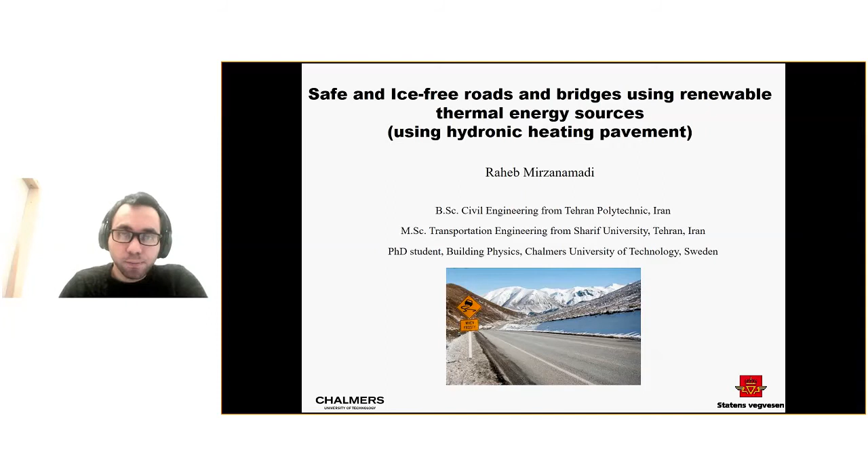I have to say that the research I did in the last 3.5 years resulted in a few publications, which this presentation is based on. The first are 2 published journal papers: one in Construction and Building Materials, and another in the Journal of Cold Regions Science and Technology. There's also one accepted conference paper for Cold Climate, which will be held in March 2018 in Kiruna. I will give results from these papers in detail in this presentation. There are also two ongoing papers, one related to a hybrid 3D numerical simulation model, and another on the application of a model-based predictive control method, which I will give a brief introduction to as well.

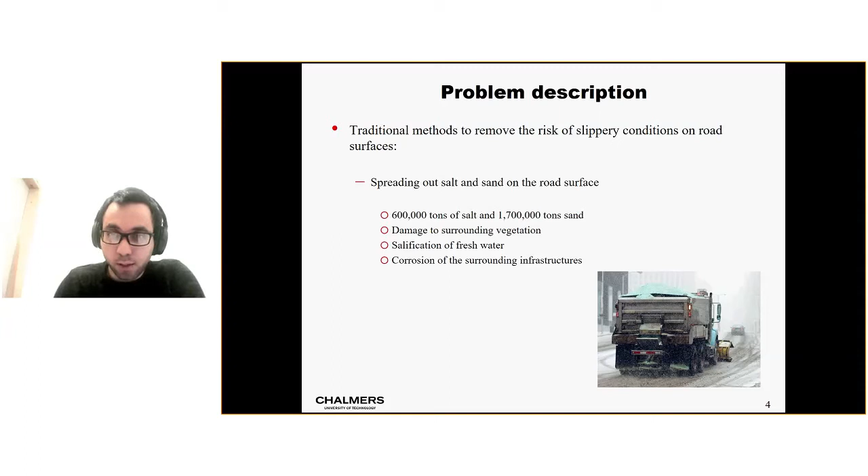So what will be the alternative, especially for critical sections like slopes and curves where drivers change friction frequently? It will be a good idea to use hydronic heating pavement.

Hydronic heating pavement consists of embedded pipes in the road through which fluid as a thermal carrier circulates. During the summer, the road surface gets almost warm, and it's possible to save this energy in a seasonal thermal energy storage. During the winter, it's possible to give back this energy to the road, to the pipes, to melt ice and snow from the road surface.

It's very important to say that in this project, we are only focused on removing ice from the road surface, anti-icing. We don't care about the snow, because we assume that all the snow coming down to the road surface is already plowed away. This is important to keep in mind, and I'll give more details in the coming slides.

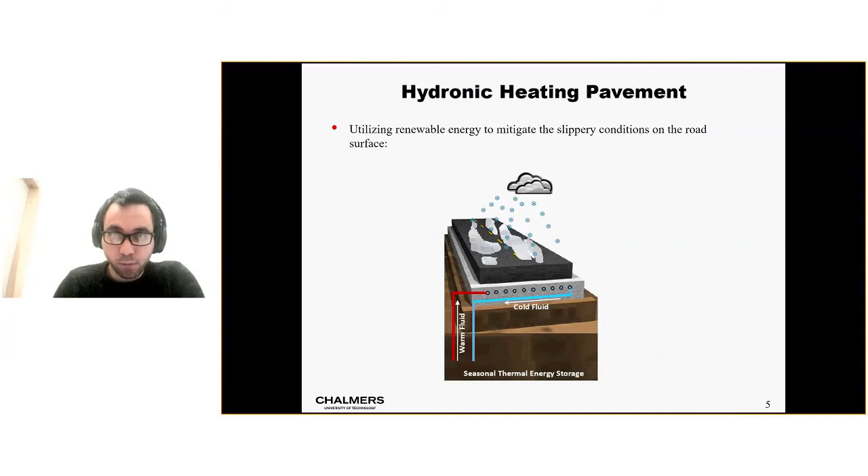The main part of the heat, as you can see here, is transferred inside the road. Most road sections in Scandinavian countries, I mean Sweden and Norway, consist of asphalt.

So it will be very important to see what the thermal conductivity of the asphalt material is. Another thing is that it's very interesting to see how different design options related to the hydronic system, such as the distance between pipes and the size of the pipes, can affect the efficiency of the hydronic system for anti-icing the road surface.

So as you can see here, the goal of this research is first to find out the thermal property related to the asphalt material. Then, before the licentiate, we focused on finding a 2D method for understanding the operation of the hydronic heating system for anti-icing the road surface.

It is very important to understand the 2D system because the boundary condition on the road surface is almost super important for this kind of system.

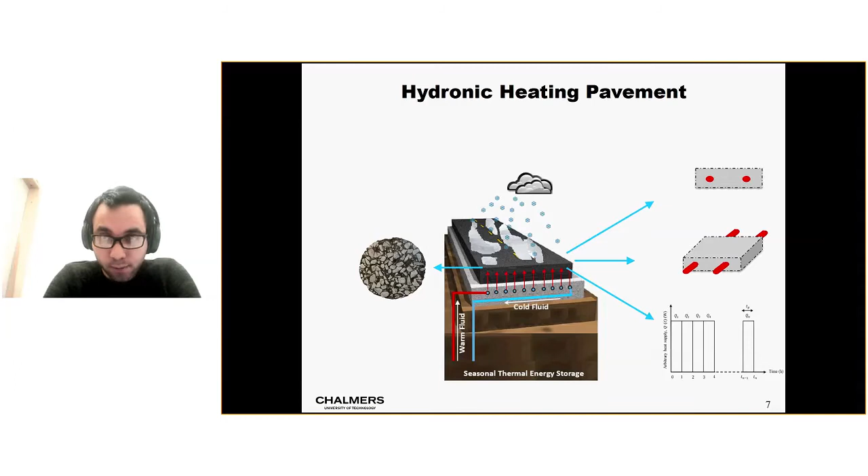So if I show my research outline, it will look like this: the thermal property of asphalt concrete, which is determined both experimentally and numerically.

The data is implemented into the numerical models related to the hydronic system, and two types of numerical models are developed, a 2D model and a 3D model. And finally, an application of a model-based predictive control model is developed to find out the optimal and minimum amount of heat to anti-ice the road surface.

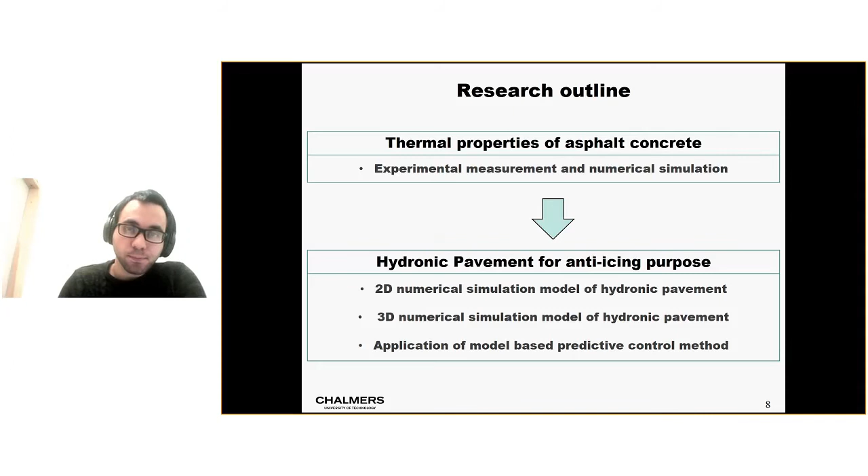So I'm going to go into details and talk about how we measured the thermal property. First, I have to say that there are different methods generally used for the experimental measurement of thermal property. The main method is steady state.

But there are two problems with the steady state method. First is the time—it almost takes 2 days or 1 day. And the second is the size of the sample.

For example, at Chalmers, we have a guarded heat flow meter, which requires 30 centimeter by 30 centimeter samples.

Since we have a lot of samples to measure, we prefer to use a faster method, which is related to the transient plane source, or TPS, method.

TPS, as you can see from the picture on the left side, is used as a sensor design. The sensor works as a heat source, and at the same time it works as a thermometer, getting the temperature at the surface of the sample.

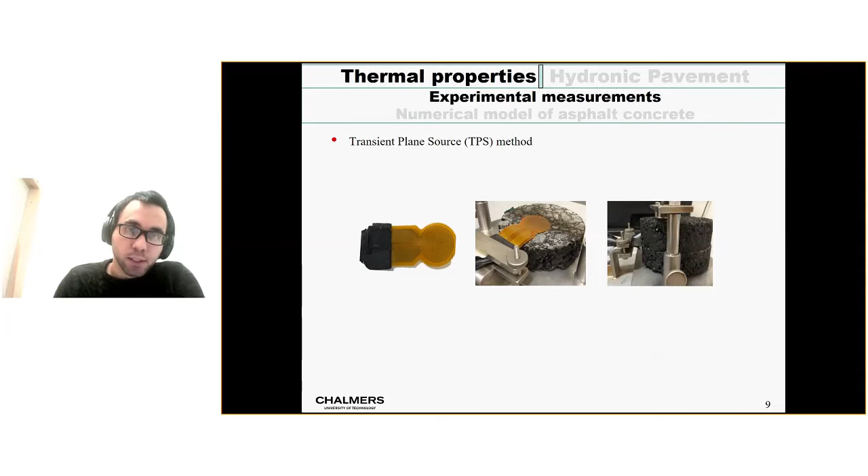Using the experimental method, we were able to get 5 different sample types or asphalt types, which are most commonly used in Sweden to construct the roads. As you can see, the thermal conductivity of asphalt, for example for ABT11, is 1.39 watts per meter per Kelvin.

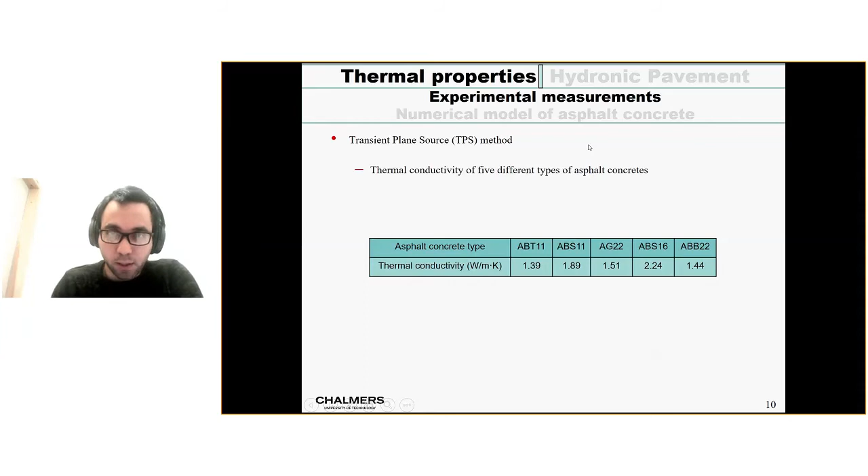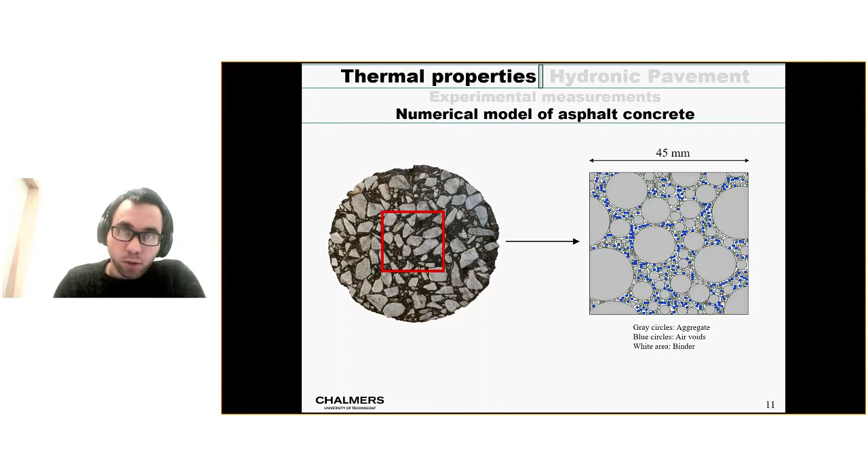Using the steady-state method, I will show for each of the 5 asphalt types, 3 different numerical simulation models of asphalt concrete built. For each of these 3 different numerical models, the thermal conductivity is calculated at 2 different sides.

This is done by putting adiabatic boundaries and a temperature difference at the boundary for each sample, and then the mean heat conduction is used to calculate the effective thermal conductivity for each sample.

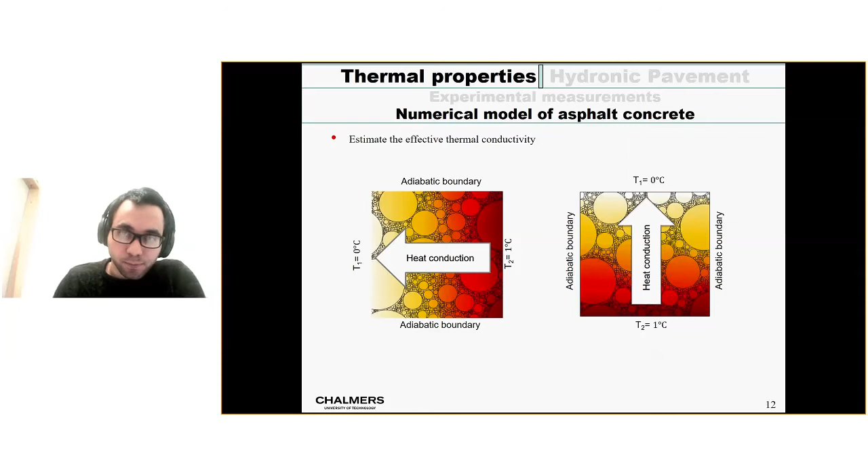The results presented here show a very promising numerical model.

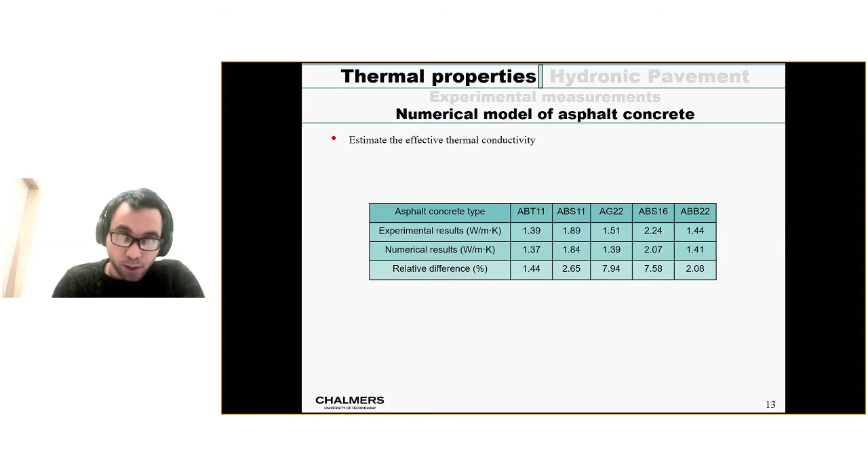This shows that we can use this numerical model to investigate different design parameters of asphalt concrete for calculating thermal conductivity. The advantage of the numerical model is that it's much faster compared to experimental work and can give good hints about what the experimental measurement will be.

5 different parameters were investigated using the numerical model, including air void content, aggregate types and gradation, modified binders, moisture effect, and the effect of saturation and freezing.

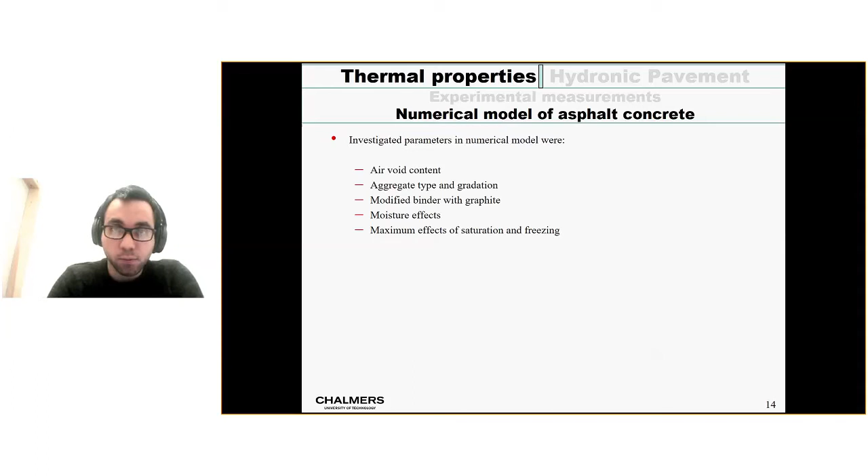Just to close off this section, I'm giving some results and conclusions from the investigation. We found that an increase in air void content led to a decrease in thermal conductivity, and changing the aggregate type from diabase, which has lower thermal conductivity, to quartzite, which has higher thermal conductivity, related to almost a 50% increase in thermal conductivity.

The details of this study are already presented in the publication, which I already showed.

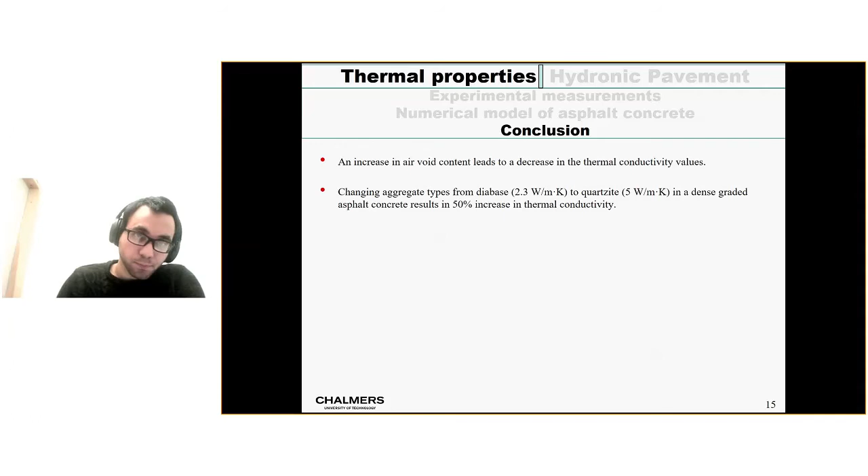So the second track of this study is related to the hydronic pavement. In this part, I'm talking about three different research projects we did: a 2D model, a 3D model, and a predictive control model.

But before that, I want to say again that in this study we assume there is no snow on the road surface, and the slippery condition only occurs due to condensation on the road surface.

7 different heat fluxes are considered, including long wave radiation, short wave radiation or solar radiation, precipitation including rain and snow, and sensible heat related to the precipitation, not latent heat related to melting ice, because all snow is already plowed away.

Evaporation and condensation, which is the reason for this slippery condition, and also convection and conduction, are considered for this study. The ambient temperature is implemented in the 2D model, as you can see from the left picture, in order to measure how much heat is required to melt the ice from the road surface.

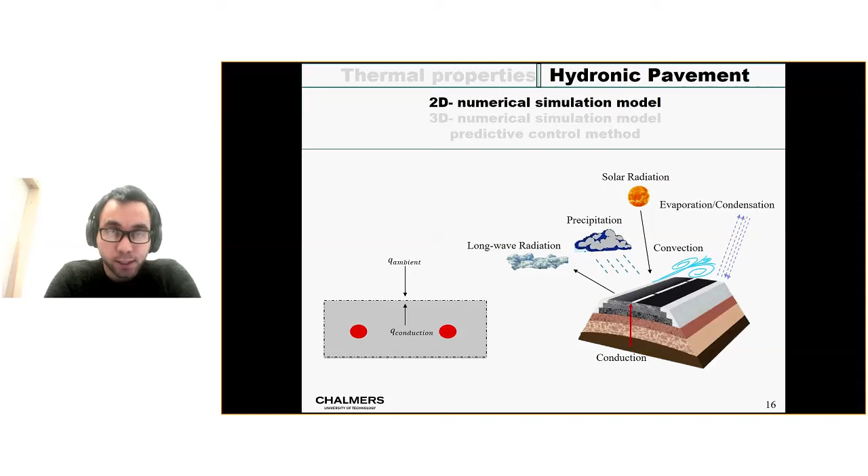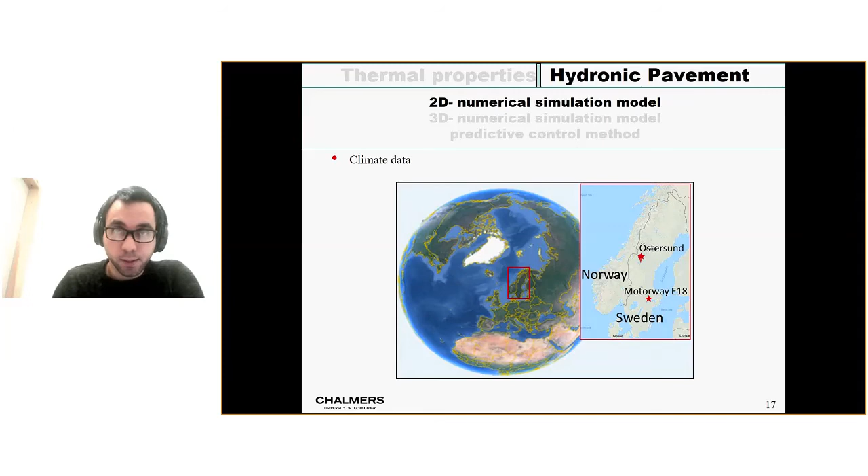The data for this study are obtained from Sweden, motorway E18, to validate the results of the numerical model, and also from Östersund. My colleague Youssef already explained the detail about why we selected Östersund. The reason was that there is an ongoing project at the moment in Östersund for a field study related to the hydronic pavement. Another reason was that Östersund is a cold area with a long winter period, which is very interesting for simulating the anti-icing operation for a hydronic system.

So the numerical model was generally developed to obtain the remaining number of hours related to the slippery condition at the road surface, and also the required energy annually needed to remove ice from the road surface.

We put some regulation to start and turn on the system. Here we assume that whenever the surface temperature is lower than the dew point temperature and the freezing temperature, the slippery condition will occur on the road surface. So we get rid of the condition that first slippery roads occur, and then we melt the ice.

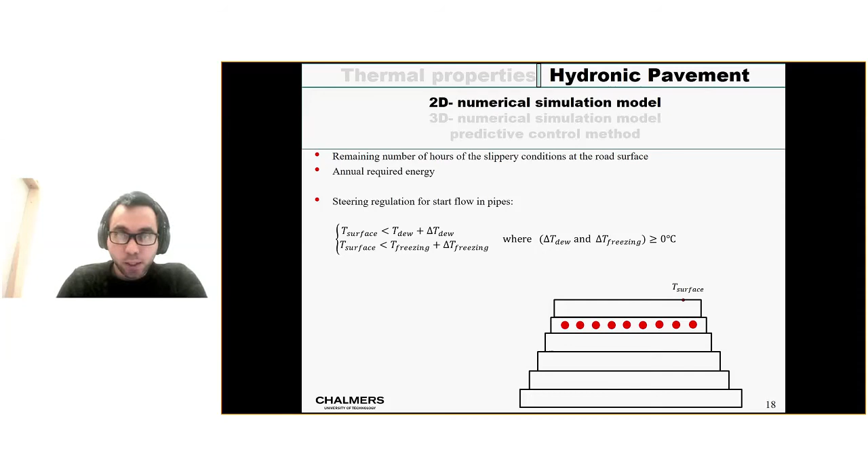To enhance the model, or to keep the road ice-free forever during a year, we add a threshold, delta T, to the model. This threshold leads to having no ice on the road surface, and all slippery conditions will be removed using the hydronic system. All of these thresholds have to be above 0 degrees. I will show the result related to this threshold in the numerical model.

As you can see here, the result is presented. The equations are shown in the upper part. The figure on the left is related to the annual required energy, and the figure on the right is related to the number of hours in which slippery condition occurs on the road surface. If we focus on the figure on the right side, you will see that by considering only a very small temperature for the threshold related to the dew point temperature, 0.1 degree, the slippery condition is tremendously reduced.

However, keep this in mind and look at the left picture. You will see that the amount of energy didn't change so much—it's almost close to 80 kilowatt hours per square meter during a year. So it means that the slippery condition, or the hydronic system, is very sensitive to the dew point temperature.

Just again look at the right picture, you will see that the bars that are tied to each other are related to the threshold of freezing. So the sensitivity of these numbers is not very high for freezing temperature. This shows an important result.

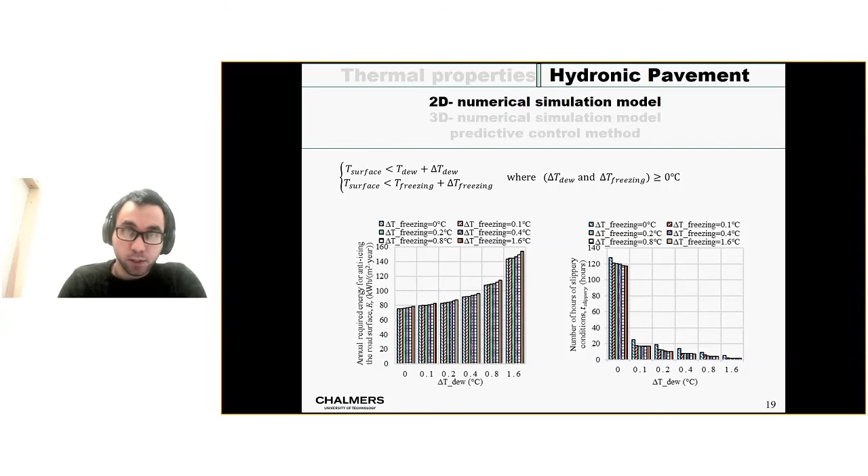It means that to run the hydronic system, it's very important to have a threshold temperature for the dew point. This is a very simple method to run the hydronic system, which I will use in future work. I will show another study where we used a more complicated method to obtain the optimal heat, but this is a simple and different way to remove almost all the slippery condition from the road surface with very little increase in energy. So I'm going forward.

There is a question always raised related to the 2D model. The 2D model is a section in which a constant temperature is set to the pipes, but there was no decline in the pipe temperature as the fluid circulates. This question led us to develop a 3D model, which makes it possible to have the inlet temperature, then get the decline in temperature along the pipe, and have T out, meaning the outlet temperature.

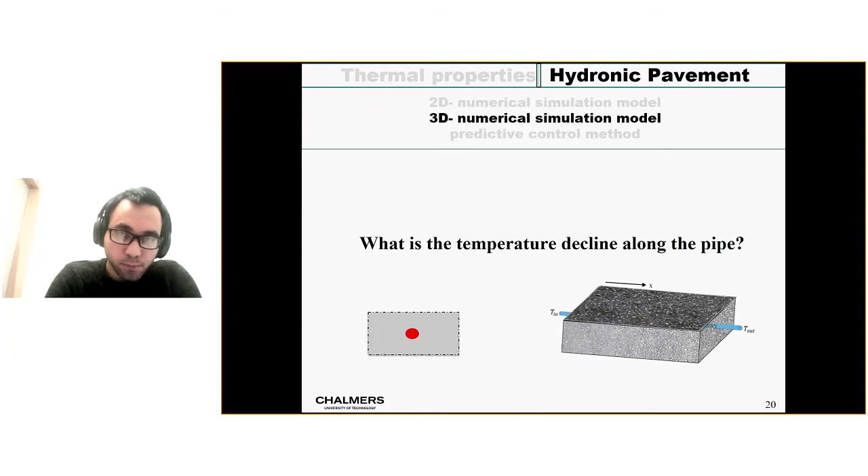For the 3D model, as you can see from the figure on the left, the road section and hydronic heating pavement are divided into smaller sections. As you can see from the right figures, these smaller vertical cross sections are connected serially to each other to make a 3D model section, a model for the hydronic system.

It's important to say that the model is adopted from Karlsson Henrik, who already did his PhD at Chalmers. The model in our division was developed both by me and Youssef—Youssef did it in Python and I did it in COMSOL, to see the difference. It should be said that this model is

almost dependent on the 2D section, as you can see from the right figure. Before my licentiate, we already did a lot of research on the 2D models and validated the model both by experimental results and also using analytical results. So we were almost sure about the 2D model, and then it was possible to connect them serially to obtain the 3D model. This is the reason why we selected this method.

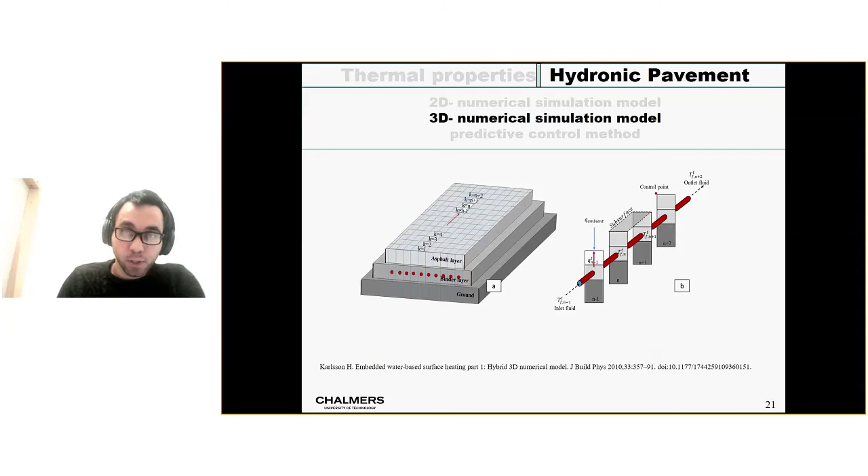The 3D model is validated with a numerical simulation and an analytical solution, which determines the drop of temperature along the pipes. The equation used in the analytical solution is presented in this picture. T out equals Ts, the surface temperature, here assumed to be 0 degrees. T inlet is assumed to be 10 degrees, and T in minus Ts involves the exponential of the length of the pipe, assumed here to be 160 meters, and small l, related to the characteristic length, which depends on the resistance between pipe and surface, the speed of the fluid, the inner diameter and radius of the pipe, density of fluid, and specific heat capacity of fluid.

The section of the road was kept simple, only one layer, as you can see from the left picture, and the results are presented on the right. As you can see, the results are very close to each other, with a maximum difference of less than 4%.

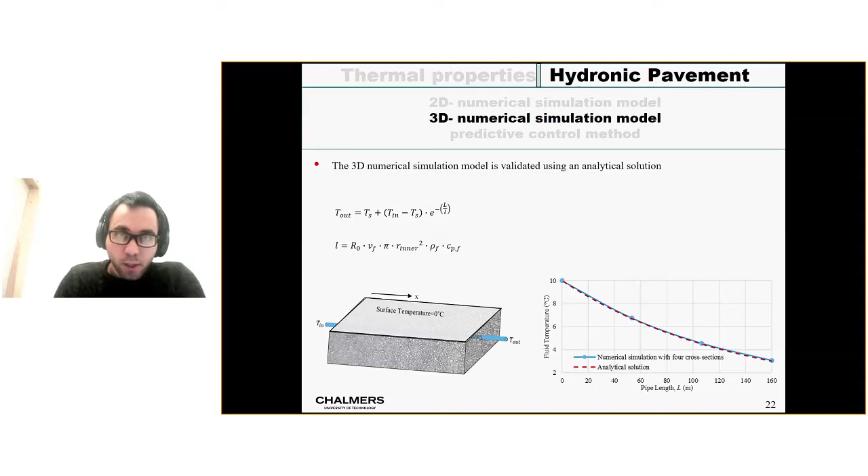So moving forward, this 3D numerical simulation model is used to obtain the distance between pipes, embedded depth, pipe diameter, fluid temperature, and fluid flow rate.

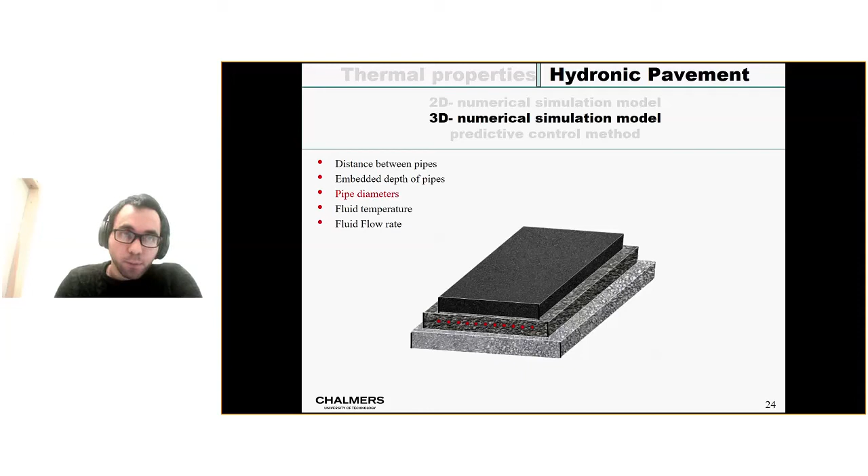I'm giving a result related to the pipe diameter. As you can see here, when the outer diameter of the pipe varies from 13 millimeters to 30 millimeters, the number of hours of slippery condition is reduced. This makes sense because increasing the size of the pipe increases the amount of heat reaching the surface. But the interesting point was that after 30 millimeters, the system works worse, in an opposite trend.

The reason is that the fluid regime changes from turbulent to laminar. As you can see from the right figure, the thermal resistance between fluid and the pipe wall suddenly increases when the outer diameter is higher than 30 millimeters, and this is related to the fluid regime.

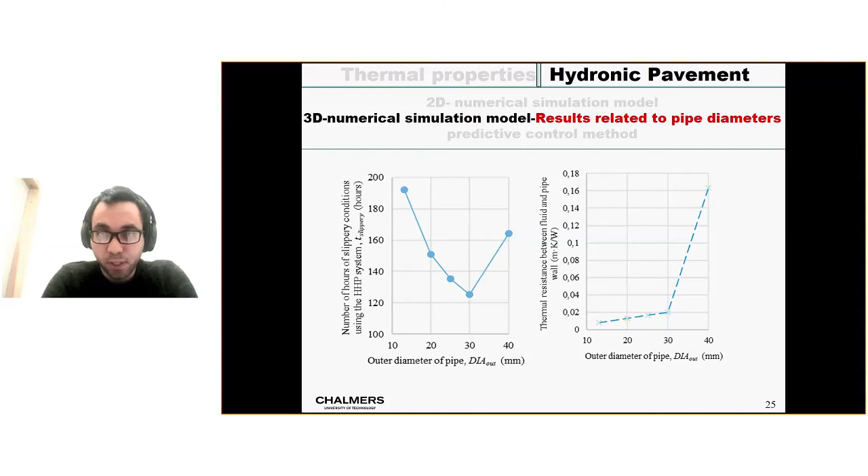An obvious result is that by decreasing the distance between pipes, the performance and efficiency of the hydronic system will increase—placing the pipe closer to the road surface, increasing the outer diameter of the pipe. But as I mentioned in the previous section, one should be careful that the fluid stays in the turbulent regime.

And increasing the fluid flow rate results in improving the efficiency of the hydronic system. All details are going to be presented in a paper. We hope that probably in 1 or 2 months we are going to submit it in detail.

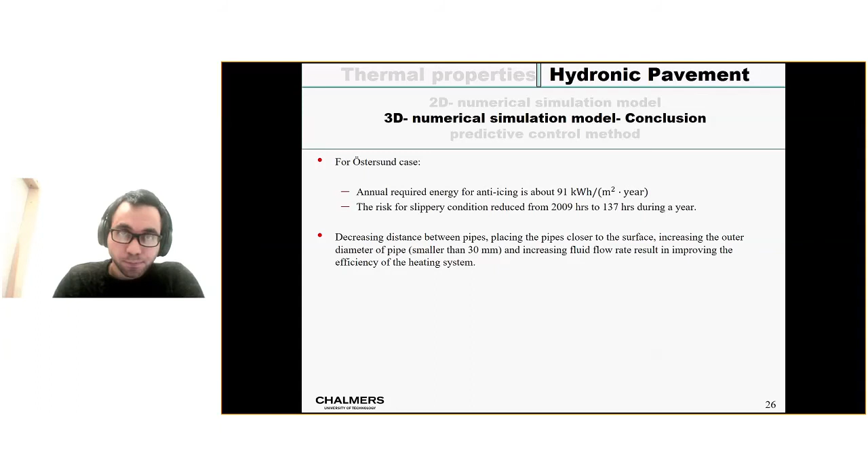So the last part of the study I did so far related to the hydronic pavement was about the minimum amount of energy, or optimum amount of energy, possible to use while keeping the road surface ice-free.

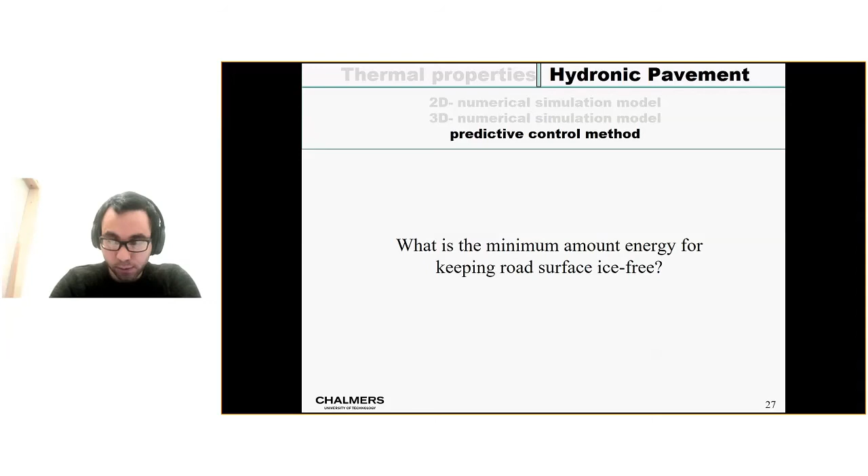This is used to obtain the elementary response of the heat in a control point when the heat is injected into the pipes. This is very important. The control point, I have to say, is a point on the road surface between two pipes in the last section, meaning they're exactly at the outlet section of the road.

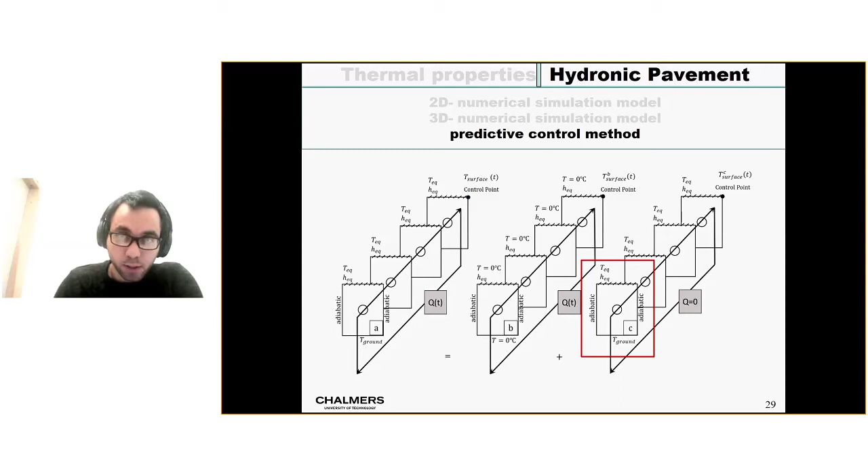This equivalent temperature should be investigated. How will it differ from a case that all heat comes to the road surface? Means that in this model we try to make a simplification. This simplification should be compared with the total conditions. But first I am going to say what the simplification is.

Here we assume that the equivalent temperature at the road surface is only obtained from convective heat flux, long wave radiation, and the short wave radiation or solar radiation. Meaning only from the dry roads and the wet part of the road, including the sensible heats of the rain and the snow, and also condensation, evaporation, are ignored.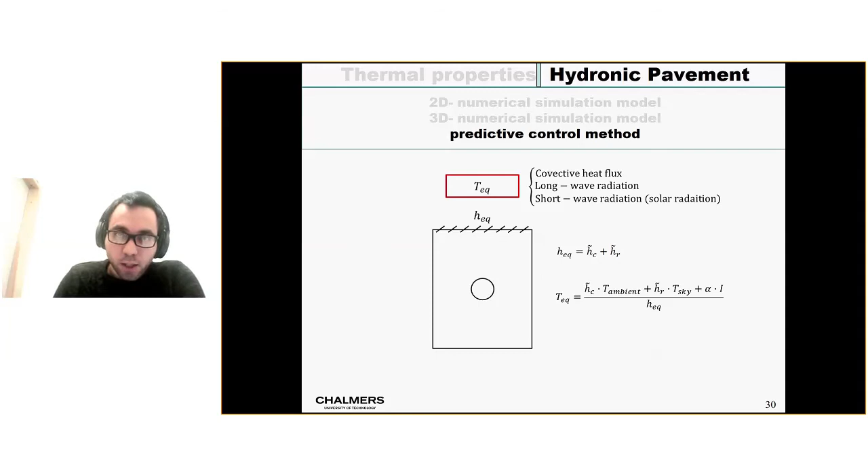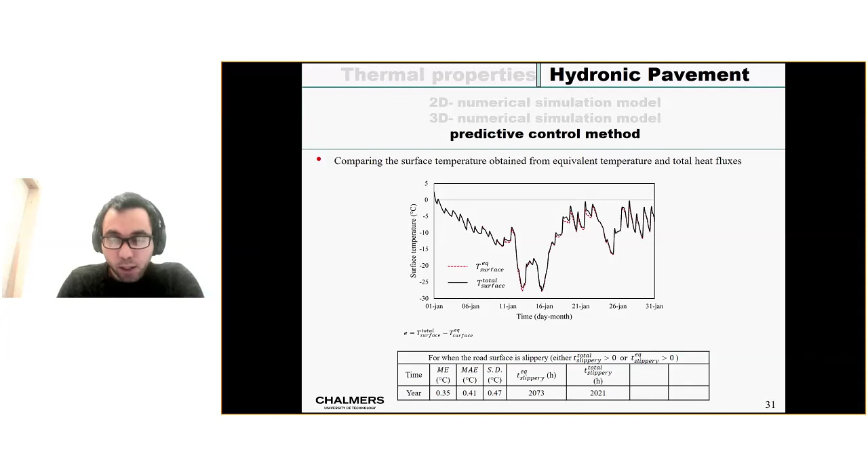So using this simplification, we can obtain the optimal heat. But first, we have to obtain the elementary response as well.

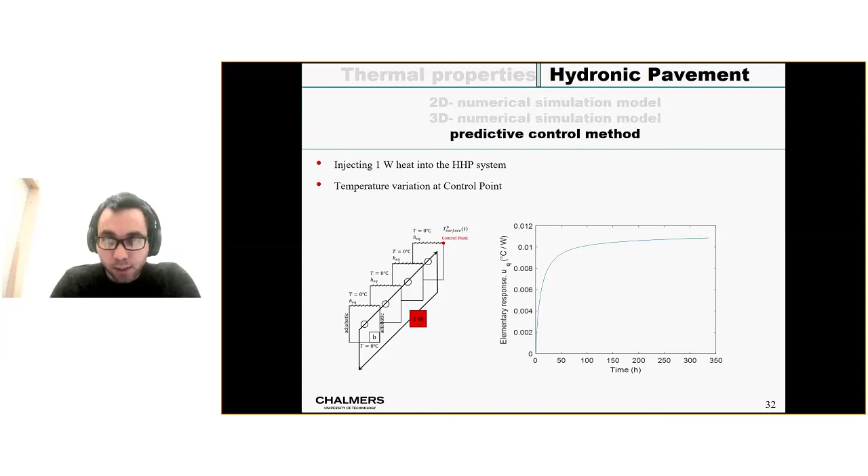And after 2 weeks, we assume that the elementary response gets constant.

So heat pulses are considered to be injected into the pipes. There is a special duration for each heat pulse. Here we assume that TP is equal to 1 hour. It can be everything, but here it's in line with the climate data we have.

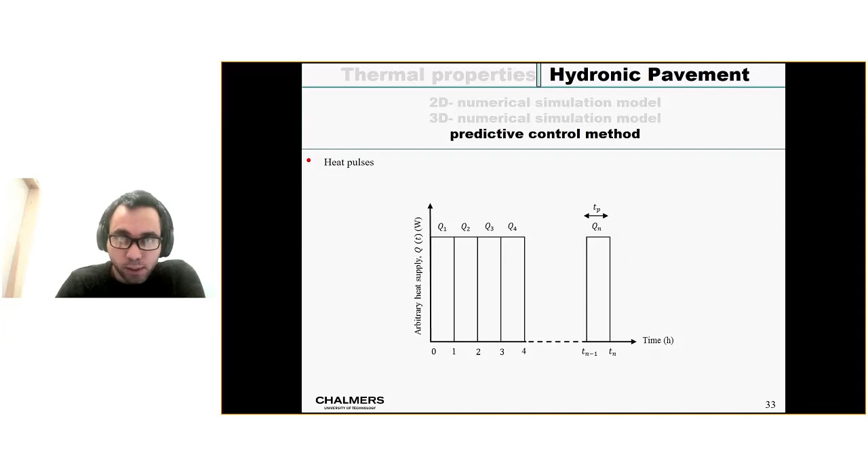It's important to say that the heat pulse should be higher than 0 watts. It could not be lower, because in that case the system will start to cool down the surface, which is not interesting. So it always has to be above 0, which is injected and hits the surface. And I have to say there have to be some upper boundary, otherwise we cannot inject it in tremendous or huge numbers. We have to always be in practice. In this study, it's considered to be 1,000 watts.

The operative temperature response can be obtained using the elementary response in the beginning of the heat pulse and the end part of the heat pulse, and then minus them from each other. It will result in the operative temperature response for each heat pulse.

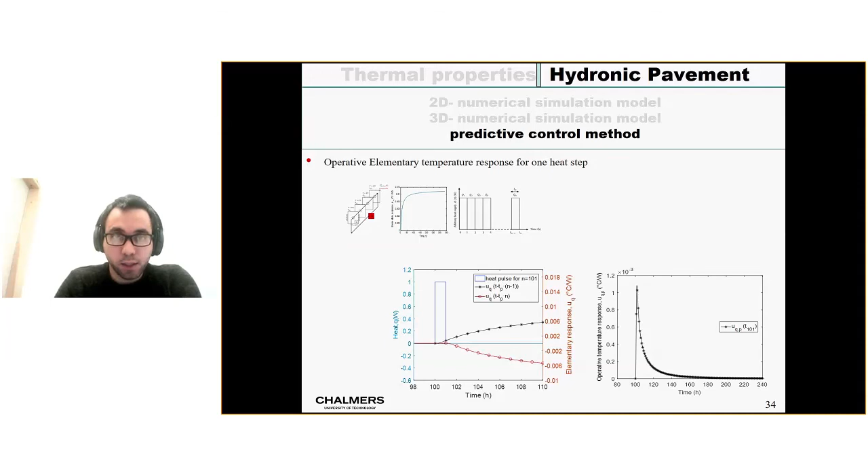The results presented here related to the Ostersund minimum required energy for anti-icing the road surface during a year is almost 110 kilowatt hours per square meter. If you compare this with what I obtained from the 3D model, the 3D model was 91.

It means that this heat is almost 20 kilowatt hour more. But using this heat means that there is no slippery condition on the road surface during a year.

However, in the 3D model, using that 91 kilowatt hour, we already have 137 hours of slippery condition. So this is the minimum. It's important to say that this is the minimum amount of heat we can have.

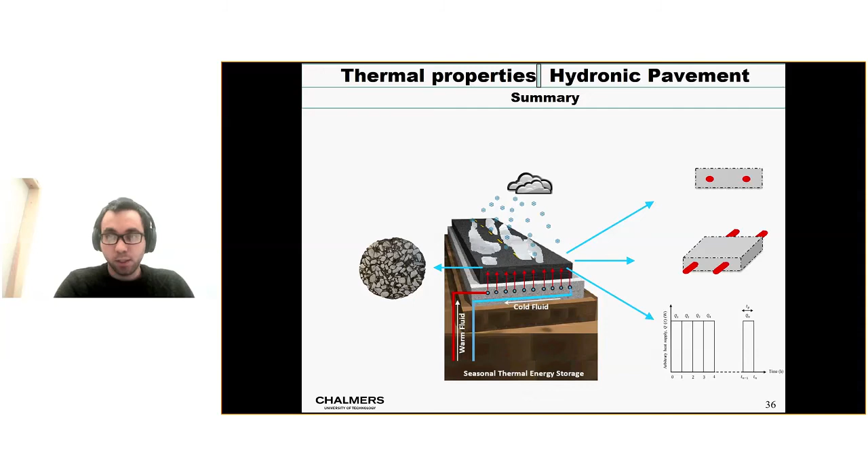So just to summarize, first the group measured the thermal conductivity of asphalt. We made a 2D model, a 3D model, and also obtained the optimal heat to keep the road surface ice free.

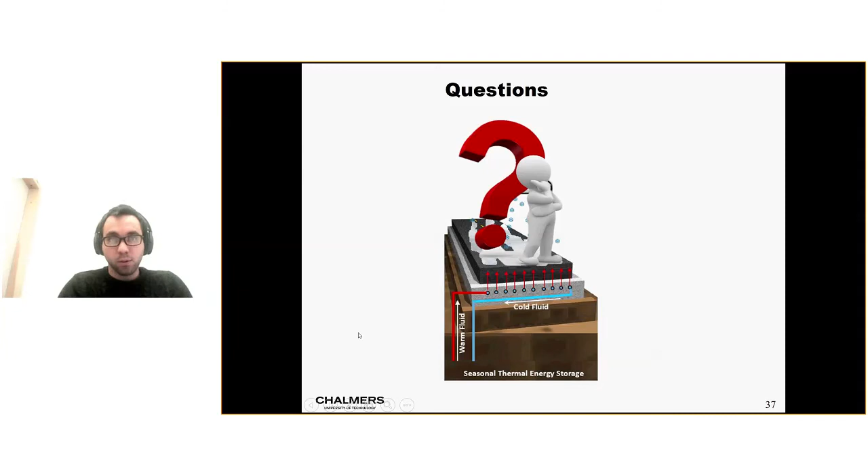Okay, and we can open for questions in writing if you like, or you can unmute and do them orally. I don't know, I'm open for every situation that you like. Then, just I cannot see the questions, so I will be happy if... I will read them to you as they come up, but I could start with a question myself.

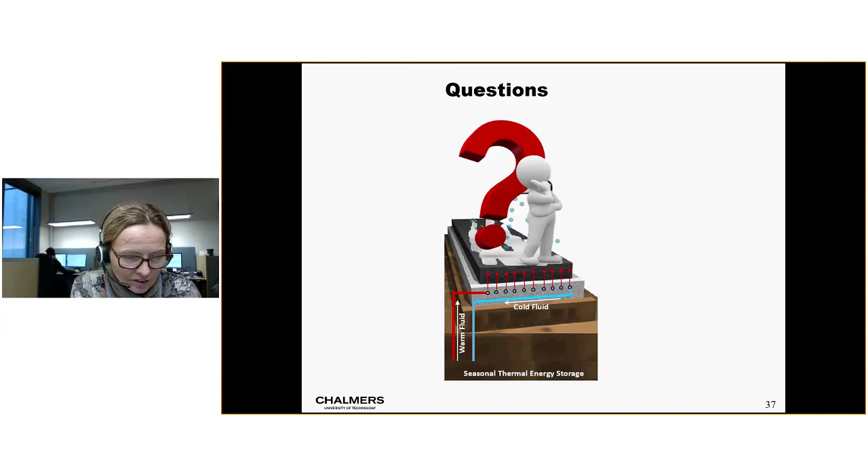I didn't get, you talked about the amount of heat that you needed and the energy and how many hours of slippery road. But do you need, to make this work on a road, any extra infrastructure? And how can that be maintained?

You mean that, for example, extra infrastructure, like putting pipes under the road, or holes, or? No, I mean about the energy demand that you have, and how will you solve that, and how will you maintain it in a very effective way?

But about maintaining and keeping this energy on the road, I would say it's not easy to say, but the reason we tried to remove the snow from the roads, if only focusing on ice-free, was to make it possible that the amount of energy we can harvest and save in storage is enough to melt the ice.